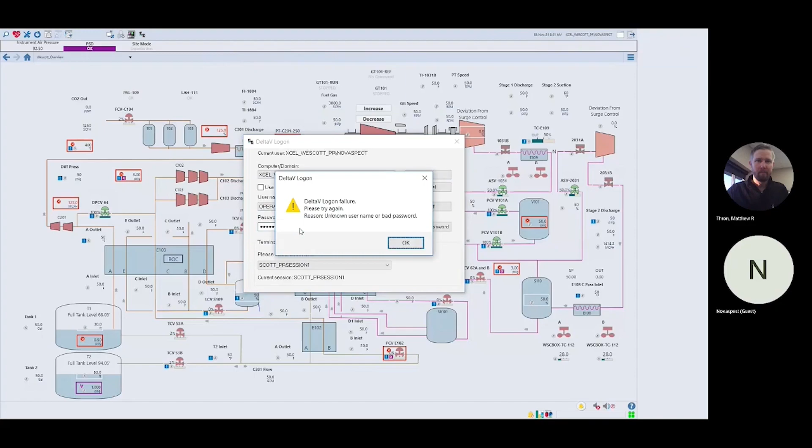So for now, at your site, it's going to be 'operator' as your username, and just 'operator' as your password. Like I said, I think that's probably going to change here in the next week. But for now, that's the password. I guess it's not on this system, but that is the plan.

So if you do that, you take your username, type in your password, just hit enter. You'll see the username change - that's to make sure you're logged in.

So then, say at the end of your shift, you want to hand it over. You can either decide to log off then, or have the next guy log off. But you probably don't want the next guy to log you off, because they might not log you off and just keep you in there. So if you click that name again, that same login shows up and there's a log off button, which will just give you no user in there. So that's kind of logging in and logging off.

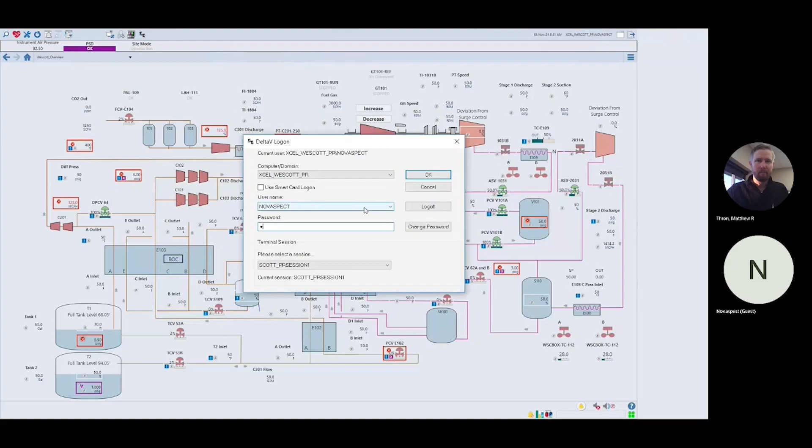Pretty easy, it's just that button up there in the top with the name in it. And like I said, the plan is hopefully within the next week, trying to do it before we start running everything, to get the usernames and passwords in there. And I know Xcel will be communicating passwords and stuff with everyone.

And with those usernames and everything, there are different privileges. So operators are going to have different privileges than, say, me as an engineer who's going out there - I can make changes, do things. Our operators are given the privileges to interact with the plant, alarms, different things like that - that's kind of the big thing.

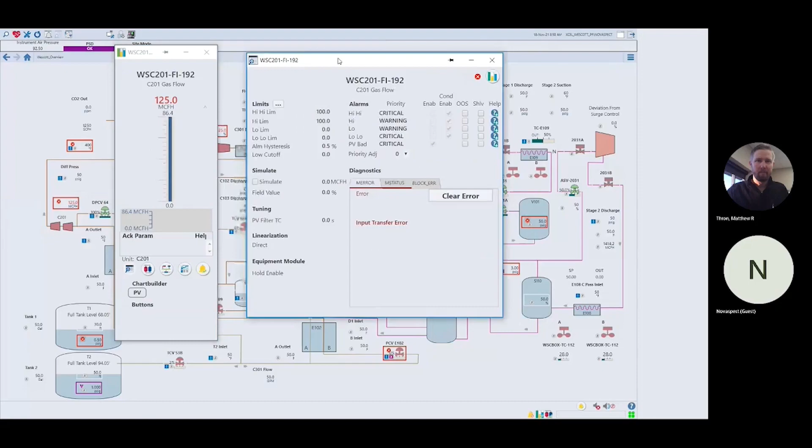Then the next one that I think is important is the tools - it's the wrench and screwdriver crossed over each other. This has a few different things.

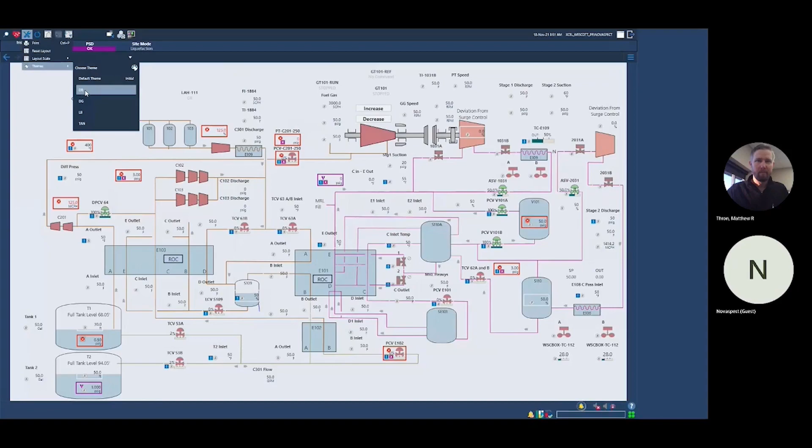The main one that you guys will probably want to change is the themes. I think there's 5 different themes you can do that change the whole theme - dark blue, dark gray, light blue, and tan are the big ones. So this is just the default, which is the light blue. If I switch it to dark blue, you get that dark blue shade. Then we've got dark gray. Light blue again is that default one, and then tan.

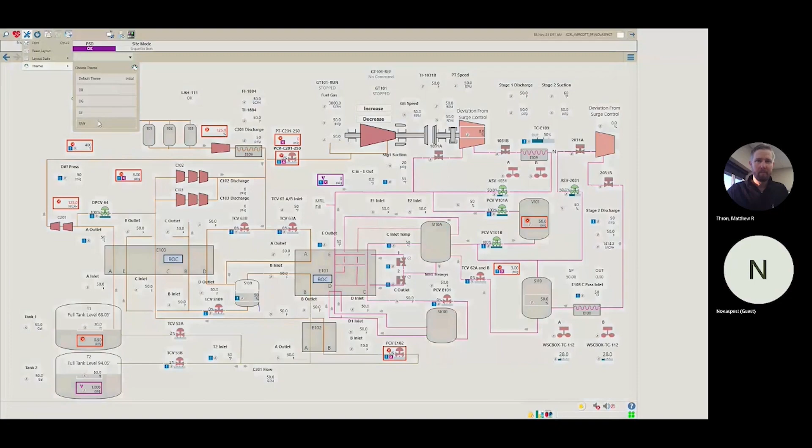It looked like an operator had put it to dark gray on site, and then yesterday or 2 days ago when I was there, someone was asking how to change it. They wanted to change it to light blue - a little bit easier, I think, to look at, but on night shift I probably wouldn't want to look at this either. I'd probably switch it to dark gray as well.

So moving on, this refresh button, that little circle button, looks pretty similar to, say, a web browser or something. This is going to be kind of important as we're still working with your site and doing things like that, because you can see on the sheet there's a little yellow star that shows up on it.

If you ever see that star, just hit that button. Nothing will change visually, but it'll go grab the newest version of the graphics. So if we made a change, that light will turn on. So if you want us to move a valve somewhere or make something easier to read, that's the only way you'll be able to see it. You'll see a little star up there, and you can hit that and it'll refresh what you've got.

So the star shows up. Yep, refresh button. Overlapping or something. Yeah, it's like on it. I think it's pretty clear to see once you see it.

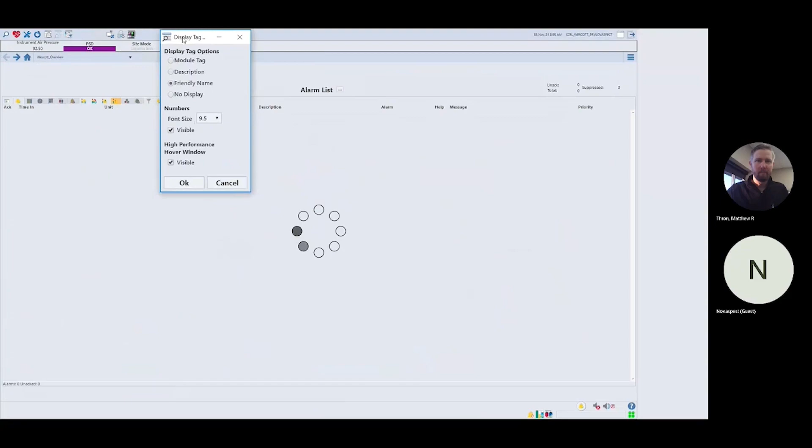The next one I think will be important for you guys, the one I've seen people use, is this display tag settings. It'll be either the last or second to last button, depending on what's open on your screen. What this does is change what the display tags say. Let me switch back here. It will change what the display tags say, like say of this valve here, we see it read as FCV C104. That's because it's set to a friendly name.

You have some options. You can do the tag, the module tag, and this is what DeltaV knows it as—that's also what you'd see on the faceplate. So the module tag is what you see up here on the faceplate. If you change it to friendly name, it'll show you what we have as our friendly name.

We've tried to match our friendly name to be exactly what you guys had on SciTech. So on SciTech you'd look at this and it'd say FCV C104, so that way you're familiar with it instead of trying to completely forget what you know. You can also do no display, but if you don't know what anything is, it's going to be impossible for you to really interact and operate well. But at least it unclutters the screen a lot.

Did you click on a description one? Yeah, so the description typically won't necessarily fit all the way, but it'll give you the first 16 or so characters of the full description. And if I open up this valve again, it's the same description you'll see down here underneath the module tag.

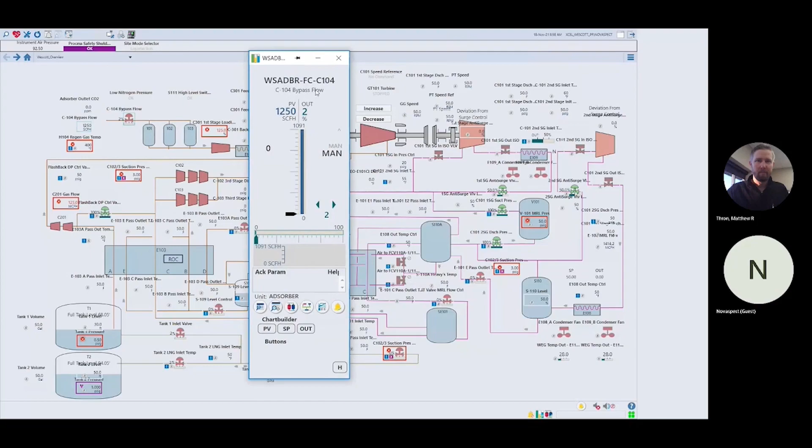So I think the site has kind of always left it as friendly name since we've gotten there. The other thing you can do in this display tag is change the font size of the numbers so you can read them a little bit easier.

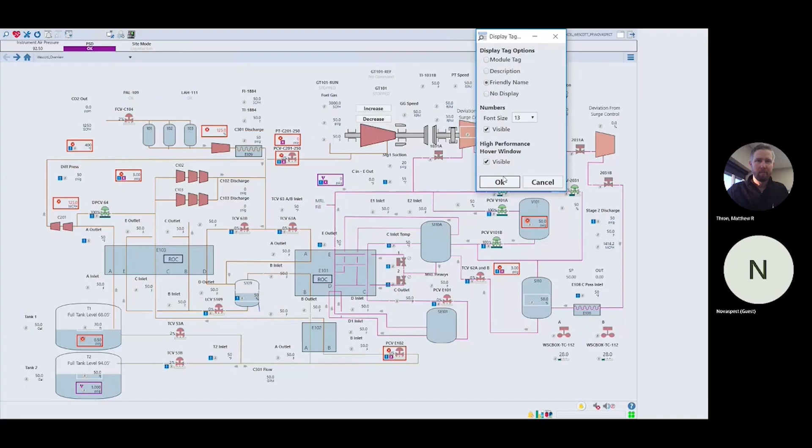When we first saw our first screenshots, it wasn't friendly - it was whatever the other one was, the module tag probably, and we had no idea what it meant. The screen was super busy. I don't know if friendly name came up after that or if it was always there. I think it was there, and when we saw that, it was like, you know.

So some of them we kind of don't have a friendly name on, like just down here, we have our tank level and tank pressure. We don't really have that yet - after we get more familiar with the module stuff, I guess we'll just maybe go back to that. But yeah, the friendly name is kind of what it is now, and like you said, it's because of what we're used to. It's not an easy change, so we try to simplify it when we can.

So like I said, the big thing also in this display tag settings is your size as well. You can change the font size so you can read it easier, so you see the numbers get a little bigger. This shouldn't normally cause any overlap, but it might in certain spots.

When you change a parameter on the display tag, does that stay with your profile? It does not - you have to change it every time you log in. I think it might be something we could look into, but I'm pretty sure it's not.

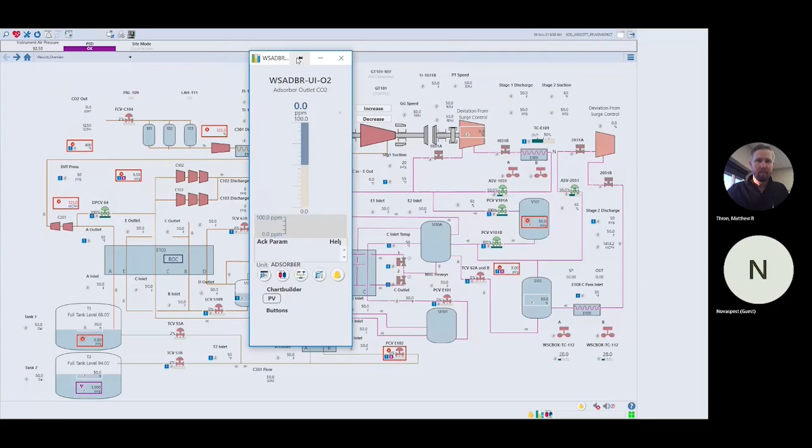So on the screen, if there's a value or a valve or something, we typically call that a gem - it's just kind of Emerson's word for it. That's something you can click on and it'll pull up a faceplate, which is where you can interact with or read more detail about what the value is or what's going on in the module.

So basically, you click on the valve or click on the value here - like you click on this, you get your C104 bypass flow. But I don't think you'll hear anyone but maybe an engineer call it a gem realistically. If you call it a valve or a reading or whatever, it'll work as well.

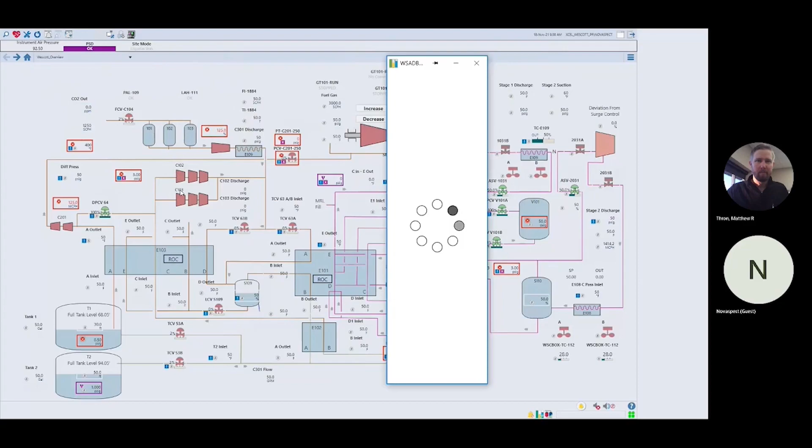So like I've brought up a few times here, this is a faceplate. A faceplate is where you can interact with modules - like a PID loop, a control valve, a discrete input-output valve, or like a pump or compressor, whatever. What this does is give you more information, more readings about what's actually happening there, as well as more buttons and things you can do from there.

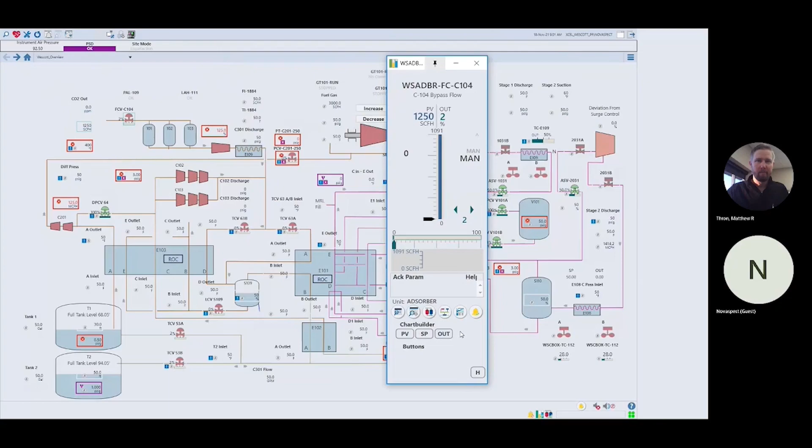So typically, if you want to make changes, you'll want to open up the faceplate to start or stop a pump, or open or close a valve - that's where you'll see that the most. Can you trend those parameters over time?

Yep, so right here is your chart builder. This is where you can read that, and it'll have however many buttons you need to trend basically what we're recording in our historian. So this is a control loop - we have our process variable recorded, our set point that we're trying to control it to, as well as our output, say on a valve. Those are all recorded, and you can make a chart with that.

And so a way you can do that is on this faceplate, like I said, this chart builder - if you just click one of these things, you'll see it add to the chart up here.

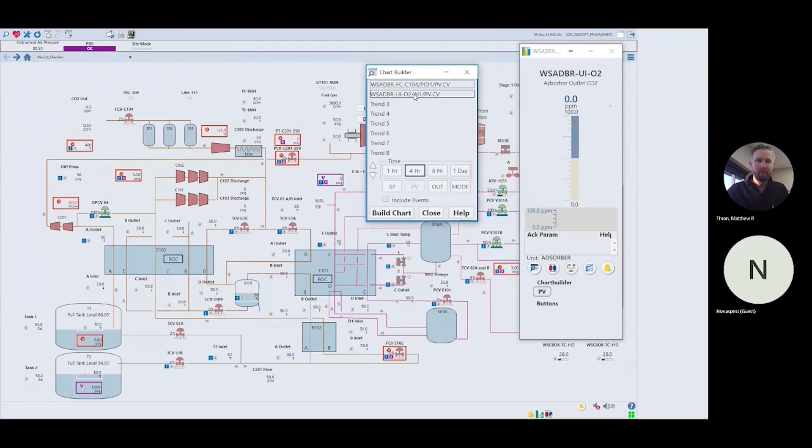And with that, you can also add more things to it. So say I want that value as well as, let's do this one, our CO2 out. We can add this to it and it'll just add straight to that chart builder. And you can add 8 things to it at one time.

And you can go back in time for 1 hour, 4 hours, 8 hours, and 1 day, just from here. You can go back as long as you've been running, but just to get the graph started, it'll show you the last hour, 4 hours, 8 hours, or a day, and you can move from there. So then you just choose that, and you hit build chart. This isn't probably going to work here because we're not recording anything.

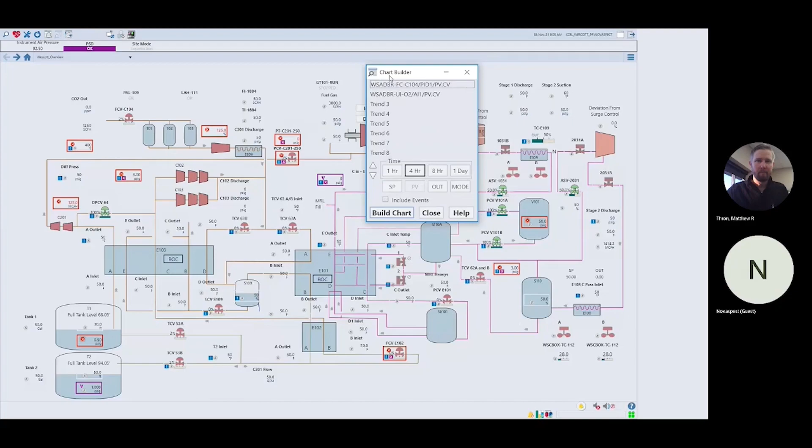But on your site, it'll pop up with a graph, and it'll have all your values there. I know we've had some operators throw up the tank 2 pressure to trend that, so they could turn on your boil-off compressors when they need to and things like that. Just some of the things I've seen.

Say you built this chart, and later on you're like, oh, I want to add another point to that chart. So this would start to build the chart on you, then go and add another point to that existing chart. Yep, so you do that through the graph that shows up. The process history view is what it will be called.

And there's a chart drop down. You can just say add point, and you can just type what you want to add. Unfortunately, it's a little cumbersome to do that. I think the easiest way to add points is just to make a new chart using this chart builder. I think it's faster, it's a little bit easier.

So then if you want to get rid of something. And here's something I talked to you about this last couple days. On the one computer in there, the operator computer, they have another icon on the top of their screen that they can click, and it'll bring up a stacked view of all the charts they have made.

The read side does not do that. Yeah, I think I figured out what that is. It's just a change I need to make on my end to make that work.

Can you pull up a chart now? I can't because we're not recording any values on here, unfortunately. Because I would like to know, like if you build a chart with T1 and T2's tank pressure, the y-axis is different on each one.

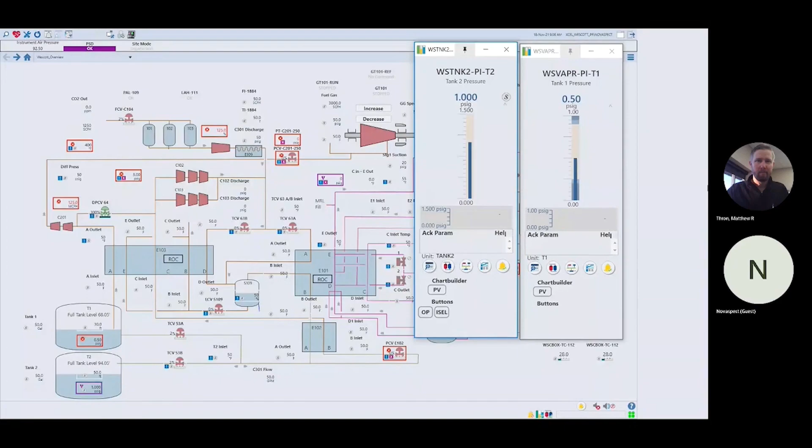Or what we can do is make a chart that we just save, that the operators can open and close. Yeah, that would be pretty nice. With the tank pressure, just one y-axis. View chart, so we can either leave it where it's just always behind your screens, or not, right? Just some of the ideas popping into my head.

But yeah, unfortunately, like I said, this system here isn't historizing any of our data, so we're unfortunately not really able to build any charts.

So from this faceplate, like we've been talking about, there's a couple things you can do with it. You don't need to pin it anymore, I turned that off for you guys. If you open up a faceplate, it'll stay open until you close it, which is something everyone just forgets about, and then it's annoying to have to reopen it. I get annoyed with it too.

So what you can do is, above the modes, there's a little caret, might be tough to see, but I'm hovering over it. If you click that, it'll bring up a little mini faceplate which shows you just the information you need: your value, your set point, your output, and what mode you're in. You can interact with it here as well, so if I want to change the output or the mode, I can do all that from here. And if I click that arrow again, it'll open up the full-size faceplate.

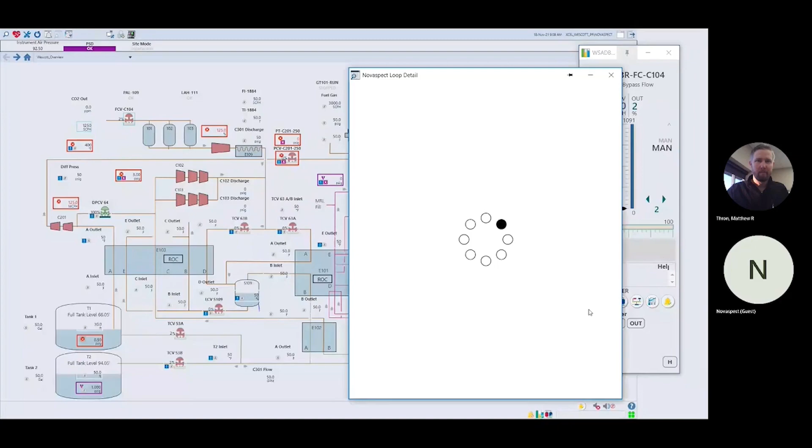From this faceplate, you can open up a detailed display, which is this button down here with a little magnifying glass on it. This is where you'd find your alarm limits, your high limit, high, low, deviation alarms, whatever other alarms are there. You can see your limits there if they're enabled.

Depending on the privileges - we're talking about changing some privileges here around alarms - you're able to shelve an alarm for a certain amount of time, like I've talked about. For example, if a transmitter is bad, you can shelve the alarm for a certain amount of time from here. Also, for a loop, this is a bit more on the engineering side, but there are tuning parameters and other things that'll show up here.

When you shelve an alarm, that basically puts it in bypass and turns it off. Is there a box to put in a reason why you're bypassing it? Yes, there will be. Does it automatically prompt you to put in a reason? This one's not showing it because I have different privileges logged in right now, but if you click it, it'll pull that up. Yes, it does require you to put in a reason for why you're bypassing it.

On site, we were testing it yesterday. It'll pull up a thing with a bunch of reasons, as well as a time limit for how long you want to shelve it for. So you can't just shelve it forever, it'll come back at some point automatically after the time. Does it put in the username also? Yes, it does. So based on your username, it'll have a reason for why you did it, as well as a timer for how long it's shelved.

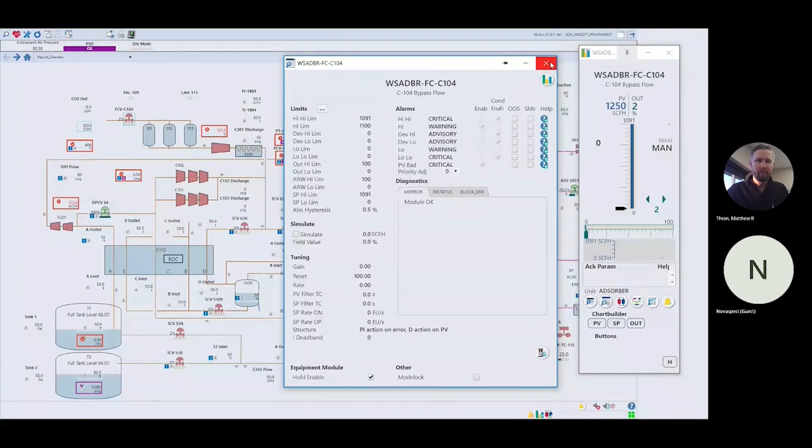So another thing you can do with these faceplates is minimize them, kind of like a window you have open on your computer. And if you notice on this menu bar, another button shows up. If I click it, the faceplate opens back up and that button goes away. So you'll see if you have more apps open in the background, like process history view or a faceplate, the buttons let you know something is behind your operator screen that you can click to get to.

If you minimize several of these faceplates and click it, it'll show you the list of all of them you have minimized. So if you just want to hide it until you get there as you're moving around the screen, it's a good option. And you can close them from there, or open them back up.

Those faceplates remain minimized even if you go to a vaporization screen. So if I minimize this, and let's just move to the vaporization screen, and if I open that back up, it'll stay there. As well, it'll stay open no matter where you go within your screen.

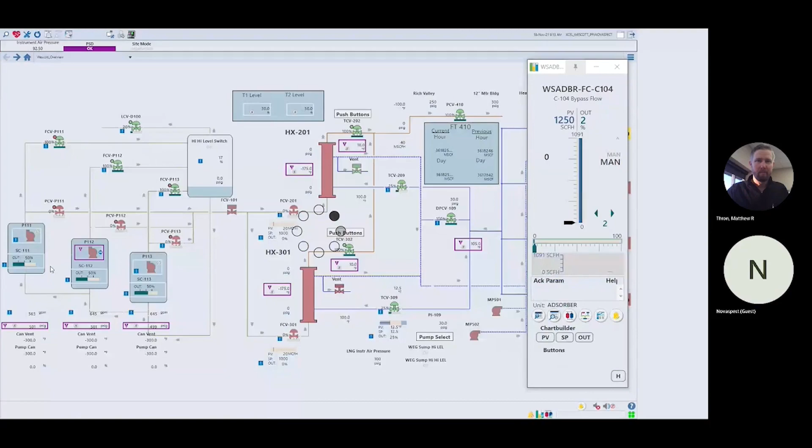So that would allow you to monitor, let's say, tank pressure and boil off while you're doing another evolution. That's another good option for making it a mini version as well, so you can put it off in the corner and keep an eye on it without it blocking everything.

Do you guys have a protocol yet on which 3 screens you normally have? No, but normally we all leave them the same, the lead operator. Normally either, so the heavy hitters are the same for everybody.

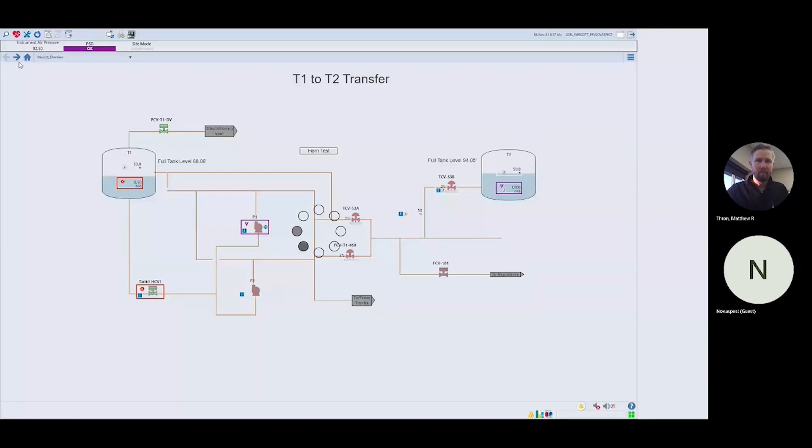You can also, if you long click, it'll show you all the ones you've opened, so you can just click if you want to skip a couple without having to click through.

And then that home button, if you click that, right now it's going to take you to this overview page, which sounds like a liquefaction page. So if you click that, it'll take you to that page.

This button over here on the side, with this, it's only one screen, so it's not going to be able to show it. But what you have is you can either swap or copy screens across. Say you have your C102, 103 screen and your liquefaction screen here, but you want them opposite. You can hit swap and choose which screen to swap it with, and it'll let you swap. The numbers will show up on what screens are what, and you can just choose to swap there. So in case you want to try swapping those buttons, it's there if you want it.

On that menu bar, is there a tools option? Yeah, if you go to tools, you can click print. How easily does that work? I'm not sure if you guys have a printer that's going to be connected up to this.

I think that's what I'd have to talk to Chuck about. With the old SCADA system, there would be times when you'd see something anomalous or weird, and we'd immediately print. It was print, and then I can't remember if there's one more print screen, but it immediately spit out, for troubleshooting stuff. No, I know exactly what you're talking about.

I want that to be really easy, because sometimes these anomalies might be really quick. So if you hit that print button, get a screenshot of that really fast. You hit that print button, it just pulls up a print menu page, and it'll have the printer set up that will be connected to it. But there needs to be one connected. I'll talk to Chuck maybe tomorrow, if he's there, and make sure we have a printer hooked up to them, so then we can just print directly to that when you do it.

I would hate for that to be like, oh, where do you want to put it, on your H drive first, blah blah. No, I just want it to spit out and hurry up, you know. Yeah, it'll just say print.

So Sam, in that regard, what Dave's asking, let's say I'm a little slow on the print, but can I go back 2 minutes in history for that screen and see the state of affairs? So the history won't work as, say, on the graphics. This is where your process history view and your chart builder would show up. So if you did see something weird on tank pressures or things like that, you could build a chart and see exactly what values were, what state things were in, and stuff like that.

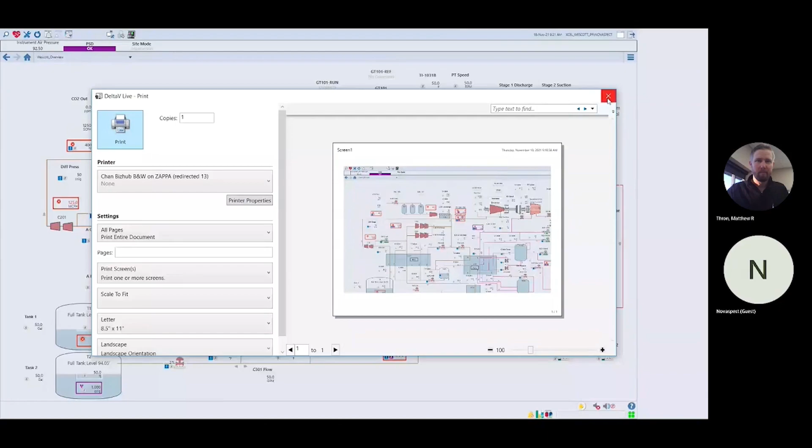So you can, on that chart builder, if you didn't have a certain value up in the chart, if you want to go back, like you were saying, print it out, can you go back in that chart builder and go back to the history of that point, whatever point you're trying to go back in history and find out what that value was, maybe a half hour ago, if something happened? Yeah, like I said, we're recording data pretty much from when we put this thing on your site, even though you didn't have a current chart set up for that.

So the other thing these faceplates will also do, down here I think it's like a 4-hour chart of your history of the data. So if you open up a faceplate, it might be tough to read, but you can at least see a quick overall trend of where the point has been, if you want to follow along with that trend. But if you do the chart builder, it'll open up and you can choose the time frame of how far back you want to go, and then there's a scroll button to just move back in time.

And so when I was on nights, I was messing around with that chart builder, track with real time. I eventually did it and I couldn't repeat it.

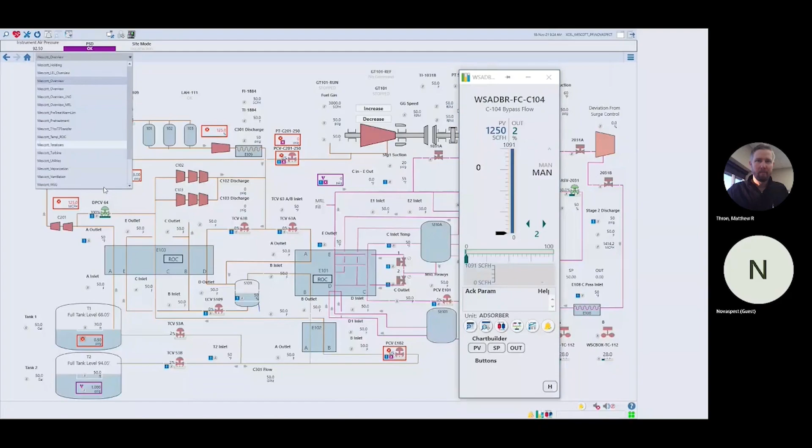So, on these faceplates, let me switch to a different display here. So there's little options with them. These faceplates are going to have a handful of buttons on the bottom. And what these will do, let me try to think of one here. Let's do this one, we'll do our temperature control valve 302.

This right now is just a manual loader. On site, we do actually have the feedback position on the valve, so it'll look slightly different than what you guys actually have there on site, as well as we'll open up a heater just to kind of see. So down here, on the bottom of the faceplate, you have buttons, and these buttons are going to give you either data or ways to interact with the controls, or whatever else you might have, and they'll only show up there if there's actually data in them.

So there's kind of a few different options here. You've got your module variables, so these are going to be values that... that's motor valve, sorry. You're good.

Just want to make sure we're not going over this later. But it doesn't tell you what it is, right? Is that it? If you hover over OP, is that module variables?

Yep, it'll tell you operator variables. So module variables are going to be variables that operators can't change, say alarm limits or what output percent to do. Supervisor privileged accounts can change it, like instrumentation guys. If you just talk to them, they can probably change it pretty easily as well. But these module variables are there more for you to see what's going on, like at what temperature a valve is going to open up. It'll show up there with the description as well as the value.

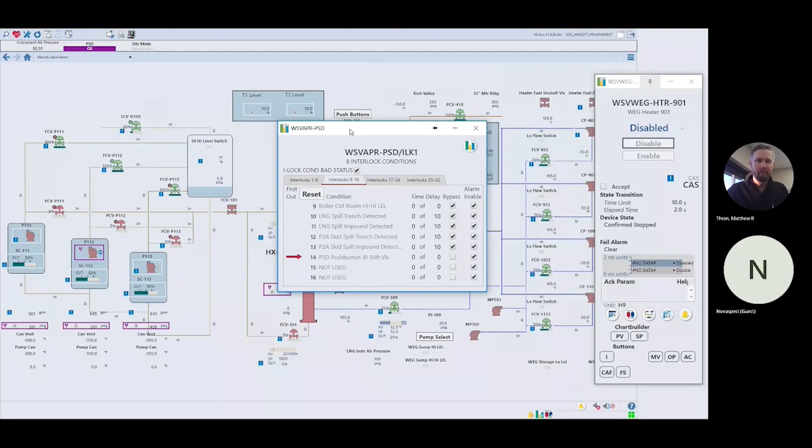So there's also going to be - I wonder if it's on here - okay, so what it'll also tell you, there's going to be a first out area on it. What this one will do - say a plant shutdown occurs, right, you lose power to a bunch of stuff from doing that. So then not just the plant shutdown will trip, but kind of everything else. Say pressure goes down or whatever else happens that might cause a trip, all those start coming in and you'll see them on the interlock page. The text will highlight, but there'll be a red arrow like you see here next to this PSD push button at the 50-foot valve. That red arrow will tell you this is the first thing that came in, this is what actually tripped it.

So yeah, that first out button is pretty important. And then if you reset it, that arrow will go away. But if you don't reset it, if you start running again and then it trips again, that arrow will move to the most recent thing that caused it to trip.

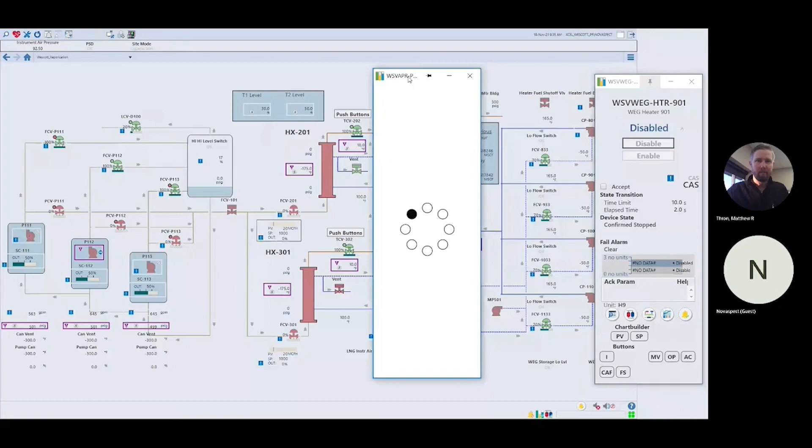Can you pull up that screen for the key? Yep, P111. This is where we should see the can temperatures and stuff like that. So yeah, you'll see also there's more tabs if there are more interlocks than that. So we've got the discharge pressure is high, the flow is low. I guess I'm looking for a start interlock screen, is that a thing?

Oh yep, a permissive. Oh, permissive. So yeah, the next thing is our permissive screen. So these basically need to be met - these conditions basically need to be met to allow you to run. Once you click on the P button, yep, it'll get to that.

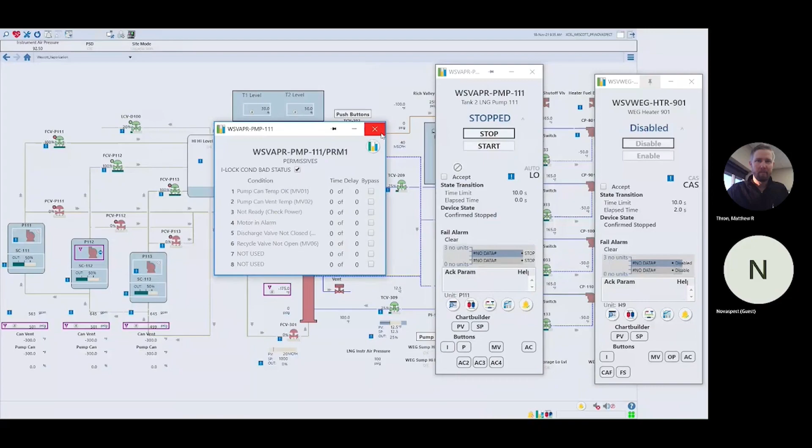Weren't you over like P111? You were over at eight, right? Yeah, so I just moved this faceplate over. So this is the P111 faceplate. Okay, and if you open up this button that says P, Permissive, it'll say - if you hover over it, it'll tell you permissives.

Okay, and that'll tell you what there are. Right now, like I said, we don't have any active, but it'll show up here, right? The can temp is okay, the vent temp - it's not ready - all these things will show up there. And so then you have to clear those or get those resolved before you can actually start that.

So that's something that we, even when we're not in vaporization season, we keep those permissives met all the time, even if we don't have an impending vaporization. So it'll be there. Everyone thinks we're not doing anything on nights, but we're actually maintaining these permissive values by cycling level and P100 and whatnot.

So you'll see these buttons, like an interlock or a permissive. You can kind of see it under the I button up here, it's flashing red underneath it. That'll tell you that there's an interlock active or anything like that.

You'll also be able to tell if this mode says LO. It's called local override, but I always think of it as saying locked out, meaning you can't do anything with it. If you try to start it, it won't start. If you try to do anything, it won't. So it's locked out in my brain - I know what it is, but I still say locked out when I see it.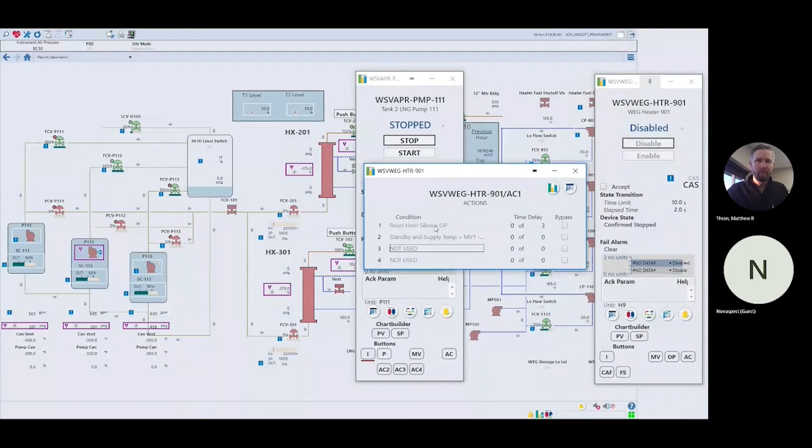So the other buttons that I think would be kind of important would say either AC on them - I'm looking at the heater over here on the right side. This is your actions. This will basically tell you an action that would occur, and it'll tell you what the action does. So if that button's lit up, kind of like that interlock is, that tells you an action is active right now.

So this one is basically like a reset horn. If the horn comes on, there's an option to reset it, and if you do that, that action will light up telling you it's resetting it. That's pretty much it, so you'll see some of those buttons as well. You don't necessarily need to see them unless you're curious about why something might start and stop at certain times. Those actions will kind of show you what they do.

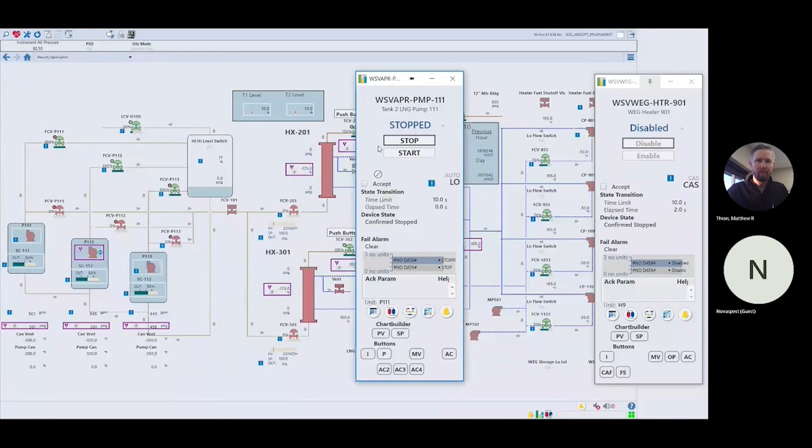Let me see if it... so like on this P111, I just clicked the AC, not the numbered one, just the first one. This is where it'll tell you - there's an active action right now where the pump is stopped, so there's no longer the pressure interlock. It's disabling it, and that's what it'll do. It'll tell you what's happening there if you want to see it. A lot of that stuff's kind of background, but you're able to at least see what's going on.

You might also see buttons - the heater, we've been looking at it this week so it's fresh in my mind - that you're kind of like, this isn't any of the other ones, what does this mean? Like this heater has a CAF button and an FS button. That's your combustion air fan and your flame scanner, which is kind of what we're going over.

If I hit that combustion air fan button, it'll open up the faceplate for the combustion air fan, or the FD fan, for that heater. But if I hit the flame scanner button, it'll open up the display of the fire eye, telling you where it is in the sequence during the light off of the boiler. It'll show this message, logic status, and status there.

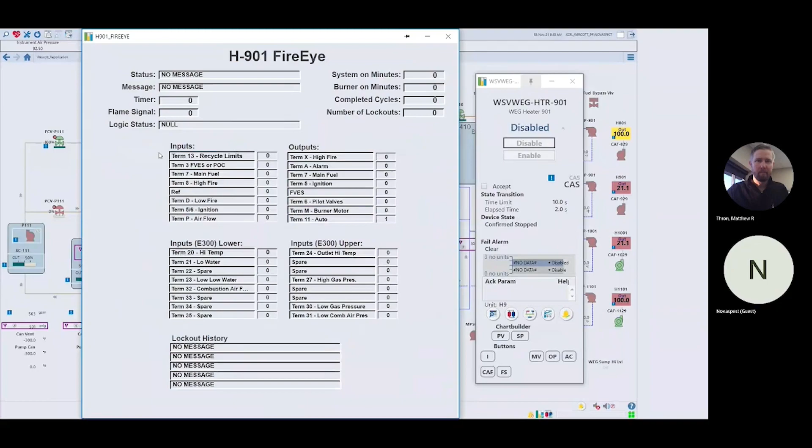Flame scanner - yep, we can change that too if we want to, if we want to call it FE for fire eye or whatever else. Just let us know if you guys don't remember or want us to make it easier. Some of those changes are pretty easy to make.

So the next faceplate you'll see is specifically related to C102 and C103. We call them equipment module faceplates, but they're basically your sequence faceplates. I clicked right here under where it says C102 sequence, and it opens this up, telling me what state my sequence is in. So I'm in idle right now. It'll say what the sequence is and who owns it.

In case it gets owned by a different sequence - but you guys aren't going to run into that, it'll always say operator for you. And then under here you can select your run command. So if it's idle, you have start and stop. If you're in the process of the sequence of starting up the compressor, there's a stop and a pause. The pause will just kind of hold you, shut everything off, but then go back basically into the sequence quickly to where it was last.

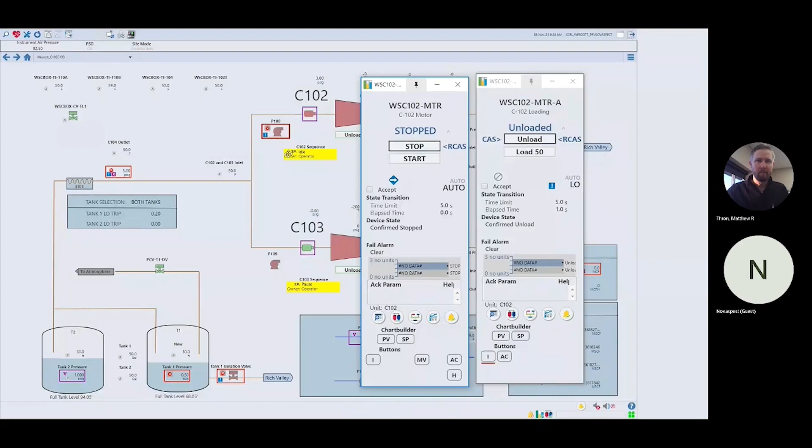But it's loading. I'm just going to force a couple things to show you guys. You can hit this load 50% and it'll go to 50%, and then you can choose to go to 100%. Then you can go back to 50 and back to 0. Back to unloaded.

So those are kind of the faceplates you might see. We'll go over a little more detail here, but let's take a quick break so I can stop talking.

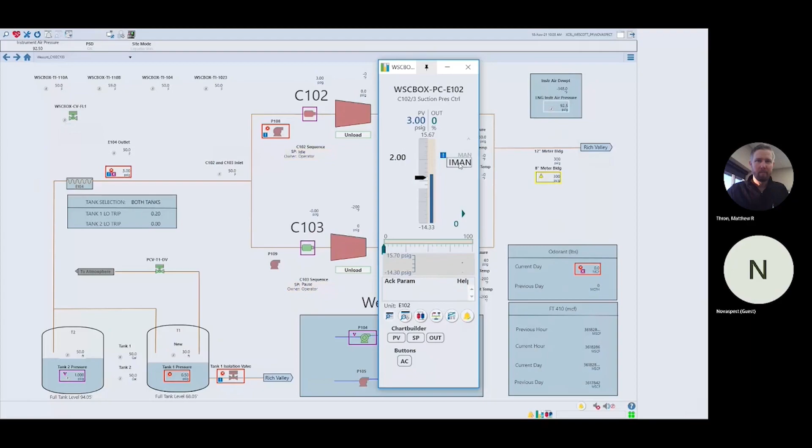And then that purple box will mean that you have some kind of error in the controls itself. Say like an IO point's bad, or there's some kind of issue. Like this one is because it's in IMAN, which of course we'll talk about in a little bit, but it's just some abnormal condition in there.

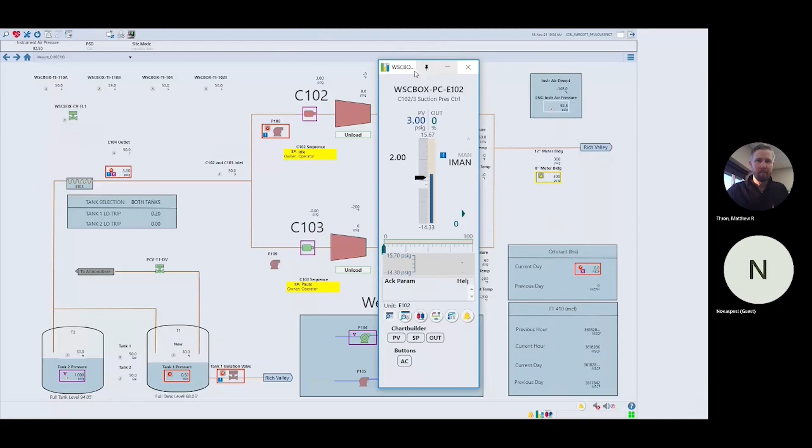That's when that purple box shows up. So that's not an alarm condition, Sam, just that something is abnormal. Yeah, it's just abnormal, right? That's beyond the operator's capability at that point, correct? Yes, yep. So that one's more like, hey, this is abnormal. I&C, what's wrong with it? Excel engineering, what's wrong with it? Or whatever else, something like that.

So let me go to a different valve here, just to take a look. You'll also see on these control valves, so like an analog valve, 0 to 100%, it'll tell you what percentage you're commanding it open to a couple ways. It reads out the percent. It's a little small to read right now, but it reads out 2% down here.

This one might be easier. It says 100%, and then they also have a little box that kind of fills up based on what percentage you're open. If you want to see it quickly, there's just a couple ways to do it there.

And then kind of like we talked about, up top is either your module name or your friendly name, kind of whatever you have it set to. And so on that, red is either off or closed, and then green is open. This is kind of the process we're using. I think one of the operators, Eric, was saying that where he used to work, it was the opposite. Kind of depends on the industry you're in. But so we're doing green open, red closed, or green on, red off, is the kind of way to say it.

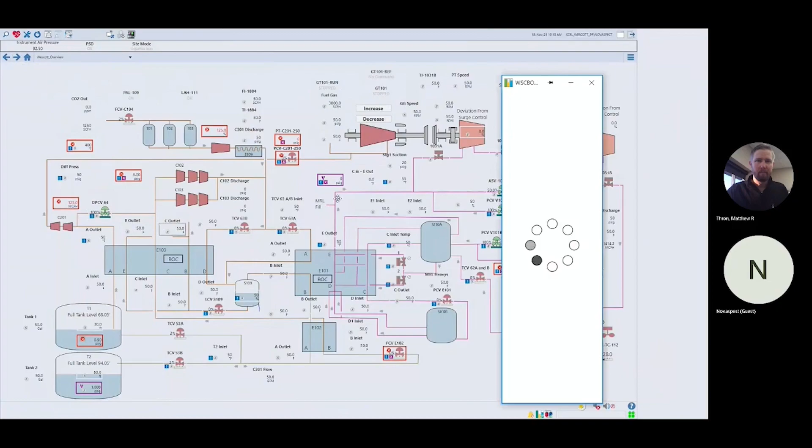All right, so moving on here — we kind of touched on a couple of things specifically with faceplates. We're going to go over a loop faceplate, like a control valve that's controlling on something, as well as a pump faceplate and a valve faceplate.

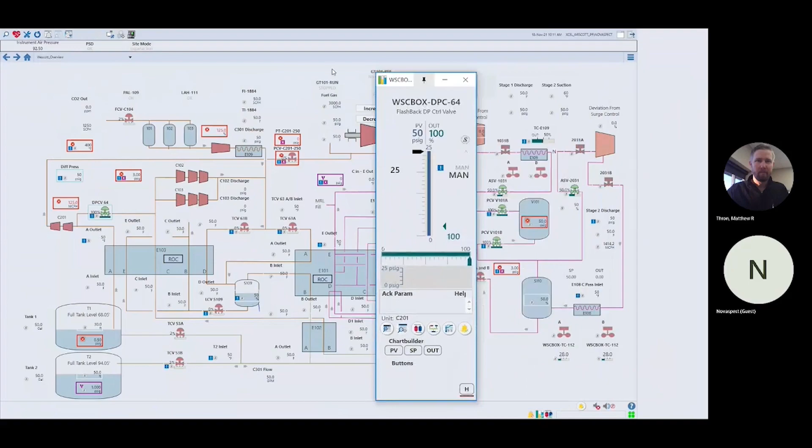So a loop faceplate, like I said, has a couple different things here. It has a vertical bar telling you what the value of your variable is, and you'll see that under PV, which we refer to as process variable. In this case, we're looking at the flashback differential pressure control valve — it's in PSI, and it ranges from 0 to 25 PSI.

You'll typically see this black arrow pointing in, and that's your set point. You can drag this to change your set point. Right now our set point's at 25. You can drag it to move it this way. Let me switch it to the correct mode here.

So why is it called a loop? What is the loop - is it the loop DeltaV component back to DeltaV? Yes. The loop is basically your reading, like in this case your differential pressure, and it loops to the control valve. The loop process is the control function telling how much the valve should open to change the temperature. It continually changes based on what the temperature changes to, which is why we call it a loop.

So in order to have a loop, you need some sort of feedback, right? Yes, correct, that's what I was trying to make sense. Some of the stuff is just like you said, good question - I just know it because it's what I work with, but it might not make sense to everyone. And some things I don't need to know specifically. No, you don't.

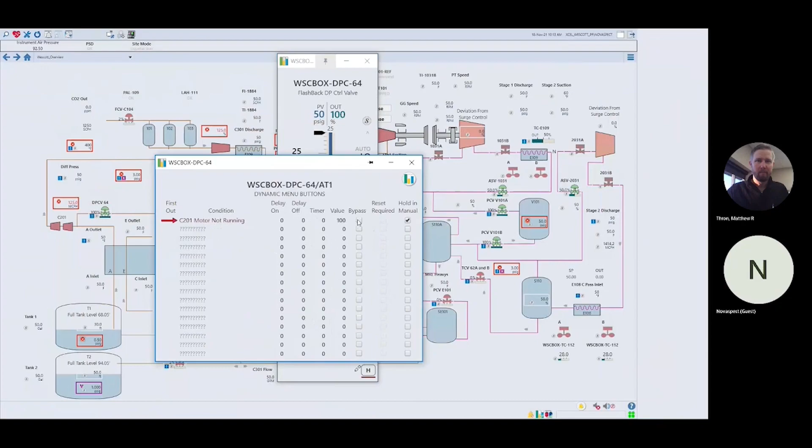So this PV is your process variable, like I said, that's the value you're typically controlling off of. So when I switch my set point to, say, I don't know, 12.5 or so...

When you change your set point, your output changes to try to control the value to that set point.

So say you have a level, and you want the level to be 50%. As your level increases, say you have a dump-off valve, so your valve opens to let some flow off, and you close it when it gets there - it kind of keeps doing that to keep it about that 50%.

Or the other way around, if it's a fill valve and it's continually flowing out, you just need to open it to keep the level where you want it - that's what that set point does.

So there's three ways - this fancy Foxboro controller - to change your set point. There's this drag function where you can just drag it. It's not as exact, but it'll do it.

And then there's these arrows, like our increment arrows, which will typically move it by one value up or down. So I hit it, it moves from 12 to 13.

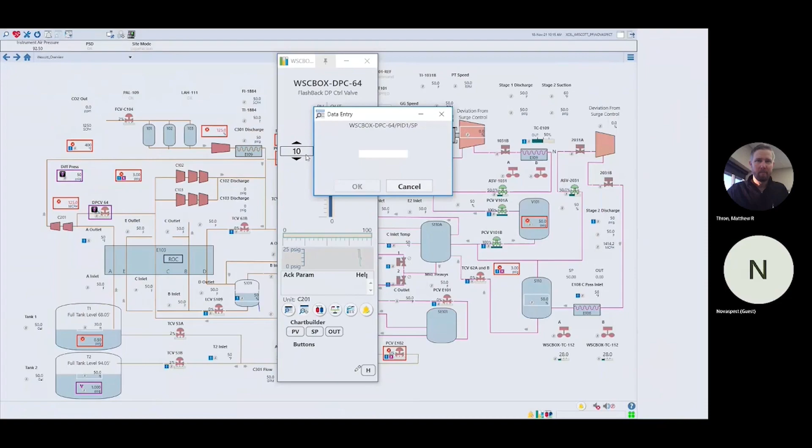So say I want to change what this is actually saying - if I want to change it to 20, I click on the 10. If I click that, it'll open up a data entry box so I can type what value I want. I hit enter, and it switches it to there.

Can you type decimals in there? You can. And if so, will the box change the increment to going up 1 or lowering 1 in that decimal? No, it won't - not originally.

So some valves, I don't know - it's something we can talk about if we want to make smaller adjustments with those buttons. But typically it's based on how big the scale is. I don't remember everything about it, but if the scale's like 0 to 10 or something, it'll change it by 0.1 or something.

Like I said, I don't know off the top of my head how much it increments by based on how big your scale is, because if your scale's 0 to 500, moving it one point at a time isn't going to do anything.

You could do like tenths or half - sit in either 0.1 increments or 0.5, and we do use that.

Maybe we'll have to see what we can do with that, because realistically, a graphical change is a lot easier to make than a control change. It's something we can definitely look at, but I'll make a note of it and take a look to see what we can do about that.

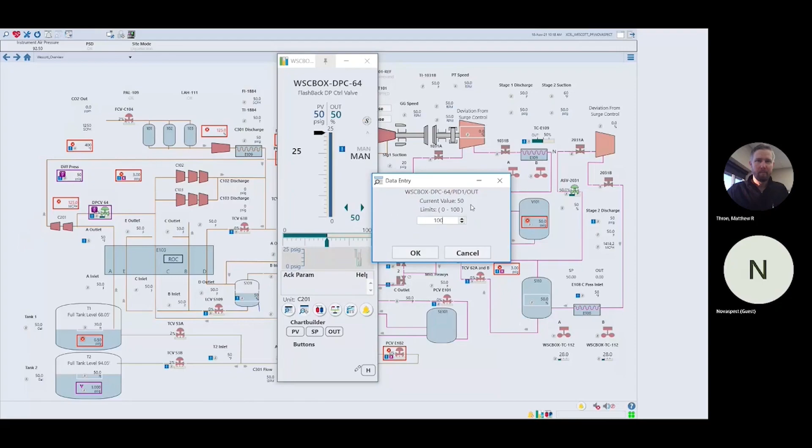Like I said, it's not an exact science dragging it like that. You can use these buttons to move it up and down 1%, or you can type it in, and it'll tell you the current value, as well as the smallest and largest value you can enter. If you go above it, it'll tell you the entry is too high, or if you go too low, it'll tell you it's too low.

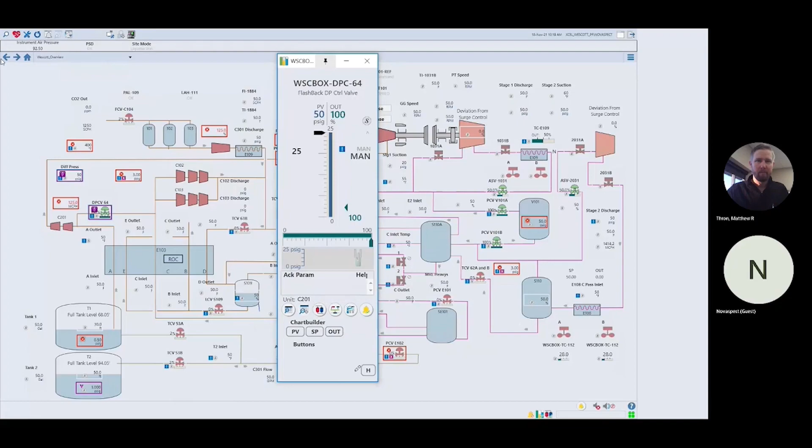We kind of talked about the chart builder a little bit more and some of these buttons down here. But these buttons you'll see are the same ones we saw in the search function, where you can open up your detailed display, your primary control.

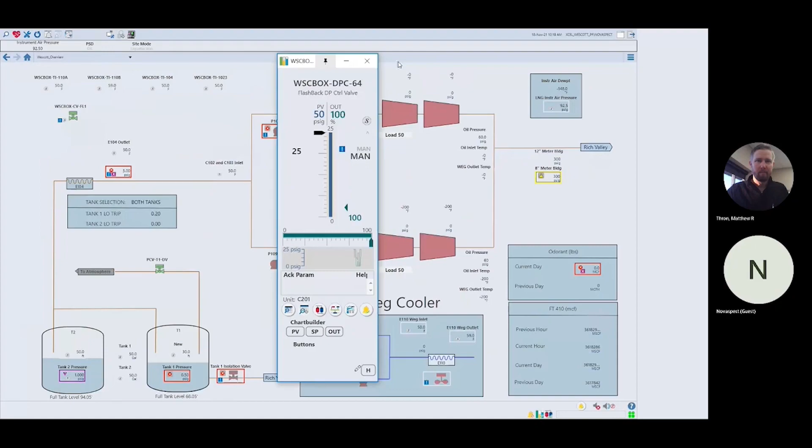So if I was on a different screen, and I had this faceplate open and say something's happening with this valve and I want to go check what's happening on that screen, I hit this red and blue button and it'll take me to that screen, back to the page it was on. And then the other main button is this acknowledge alarms.

So if you have a faceplate open and an alarm shows up, that acknowledge button will acknowledge the alarms that are active on that module, or on that equipment, I should say.

And this S here that you see, you don't want to see on your system - that's a simulate, letting you know that the values are simulated, which is kind of what they are here.

Moving on. So we've kind of shown you these valve faceplates, once again, what you could do with them, open and close them. A lot of the buttons and everything are very similar.

Something I should have shown you last time, but I'll show you now - these modes. You click the mode, it says it's in manual right now. If you click it, it'll give you an option to change the mode to whatever options you have. The main ones you'll see are cascade, manual, and auto. After we go over here in a little bit, we'll talk more about what those modes are, because getting your head around what those modes mean was confusing for me too when I was first dealing with them.

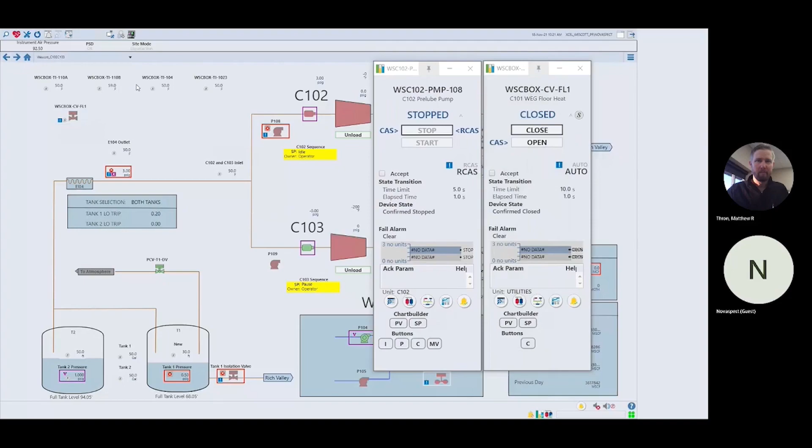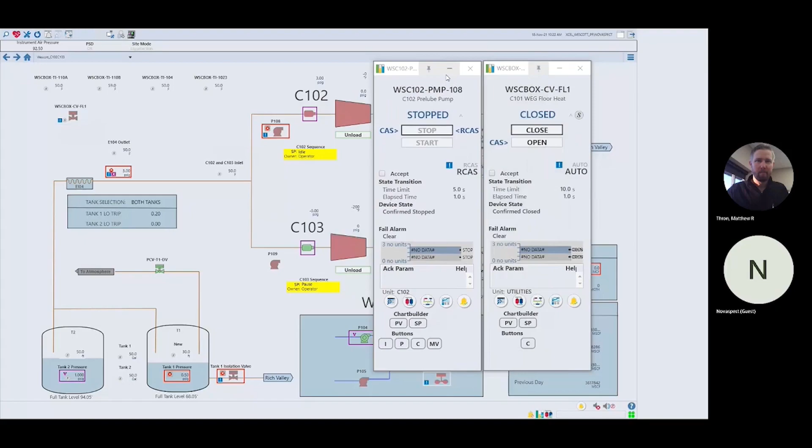So the motor faceplate is pretty much exactly the same as a valve faceplate, except instead of open/close, you have start and stop. I think for the heaters we're saying enable/disable. So they all work the same way - start, stop, open, close - it's just the wording that's different. That's pretty much the only main difference between a valve and, say, a pump faceplate.

Okay, so we'll skip ahead here to page 16, since we've kind of touched on some of these things already. This is where we'll talk about our modes and what they mean. The most common modes you guys are going to interact with are manual, auto, and cascade.

Manual means the output of your equipment is set by the operator. You won't see manual on a valve or a pump, because you're just telling those things to start or stop, and either the pneumatic pressure is opening the valve, or electronically you're starting the pump.

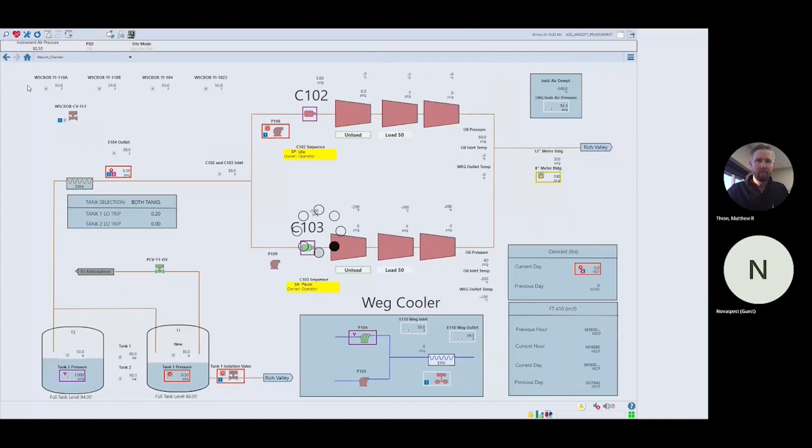That's why you won't see manual on that, but you'll see manual on a control loop, where you can see the output. You're actually changing the percentage output of the valve, which is why that's manual.

Automatic, or auto as you'll see it abbreviated, is the mode where the control system actually sets the output. This is where you set a set point. So say on a loop you're changing your set point to a certain value, and then the control system is telling the valve what to do. That's similar to a discrete valve we were just talking about.

I'm telling the valve to open, and then my control system is actually making the valve open. Does that make sense? Those ones are kind of backwards from what you guys are used to, right?

Well, I guess I'm still trying to wrap my head around that. So manual is where I feel like I should be putting in my number. But I can understand now why I'm putting in that number, but then it's automatically maintaining that. So while I'm sitting in front of it doing it, I'm manually putting in the number for it to automatically control, right?

So like I said, auto is basically what you'll see on pumps and valves, because you're changing the set point. You are saying open or close, and then the control system is saying, okay, you want to open, so I'm going to send this signal to open or close it.

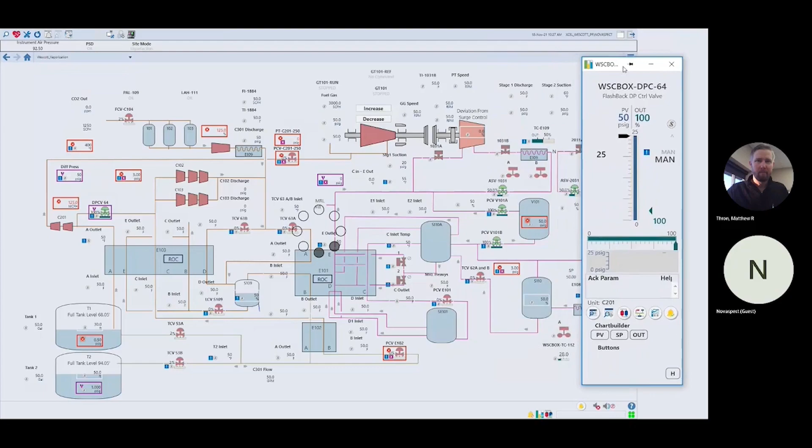So let me go to a page where I don't think it's going to show up on this one, but just to talk about something a little more familiar to your process. The firing rate of your boiler is basically set by this - sorry, that's the wrong one - it's set by this discharge temperature control loop.

The output is your firing rate on your boiler, and this is kind of how you set it. But what you'll see is this will be an IMAN until the boiler hits like 120 degrees, and then you can change your firing rate. That's because the wiring isn't connected until it gets to that temperature. So typically if you see IMAN, it's some kind of wiring issue.

With a control loop. And then local override, like I say, locked out means that you have an interlock active telling you, hey, something tripped this. You have to clear that trip before I will let you unlock this. And what you'll see as well, I don't think it's all of them, but some of your equipment needs a reset button on the faceplate. So if you're in local override or locked out from a trip, you might need to hit a reset before you can actually start controlling it again.

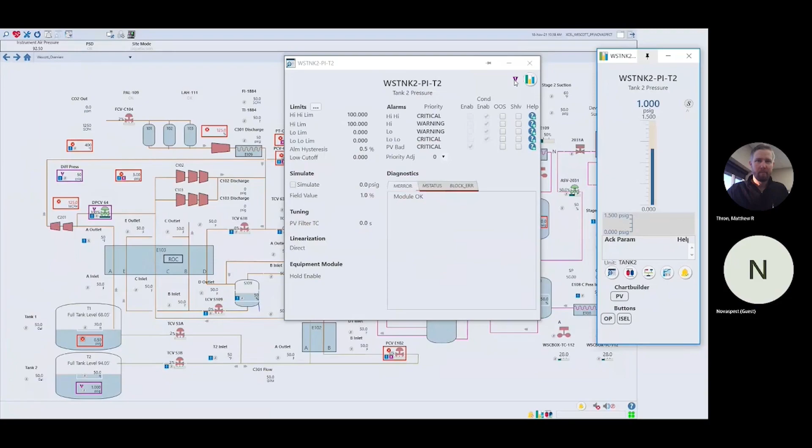Yep, it'll show up in the alarm list and it'll flash, but it will not give you the horn. I did not see the deviation alarms listed in the alarm matrix. Okay, I may have missed it. There would be a list of, I guess, the process variables or instruments that are affected. Maybe I'm misremembering - it may have been there and I just didn't see it. That would be a good list to have, I think. Yeah, I'll look and talk to some people and see what we've sent off versus what you guys have. I'll take a look over lunch.

Okay, does anyone have questions about the alarm severity and descriptions of them? If not, we'll move on.

So the next page talks about the alarm banner specifically. As I've brought up earlier, it shows your unacknowledged alarms first, then ranked by severity after that. So if you have 10 alarms unacknowledged, and 5 of them are critical and 5 are warning, it'll show all the critical alarms and then all the warning alarms after that.

And what you can do there, if you click it, it'll pull up the faceplate as well as the display that that alarm is on. So then you can actually interact with your alarm.

On the alarm banner, in the bottom right corner, there are a few buttons you can use - the important ones will be interactable. There's this yellow bell, and that's how you acknowledge all active alarms on the current screen you're on. So say I have a bunch of new unacknowledged alarms on this screen, and I hit this button - it'll acknowledge the alarms just on that screen.

The next one will silence - either turn on or off - the sound for the horns for a certain amount of time, and that changes based on your username. So if you log off, it'll get reset to turn on. The next one is the silence horn - so if the horn's going off and you don't want to acknowledge the alarm right away, you hit that, and it'll turn the horn off, but your alarm will still stay unacknowledged.

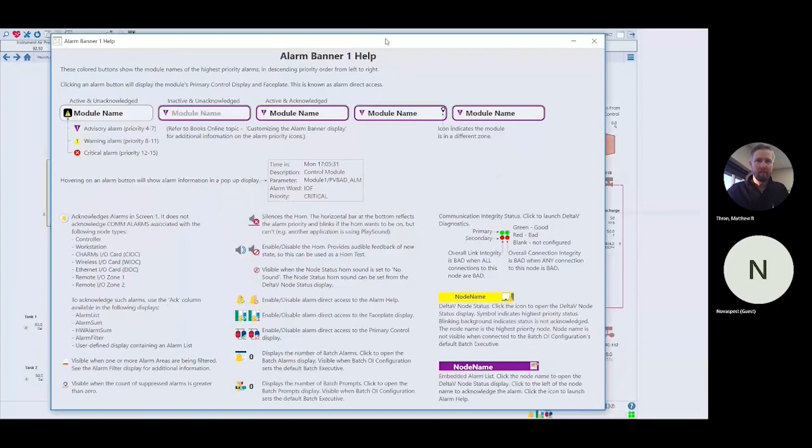And over here on the right, this little blue circle with a question mark is your alarm banner help. If you're ever unsure of what the buttons do or what any of the alarms mean, hit that and it'll give you all of this information telling you what to do.

And then finally, this icon with 4 circles in a box will show you hardware alarms. So if a computer is turned off, or any of our controllers or I/O cards or anything like that are having issues, you'll see the alarms there.

And then finally, these 3 buttons here on the bottom - by default these 2 are kind of hard to see on this screen, but on the page they point out 'faceplate' and 'primary display'. Those buttons have a little green check mark next to which ones are active. So right now, since faceplate and primary display are both active, if I clicked an alarm in the alarm banner, the faceplate and the display will open. If I just have the faceplate button selected, then just the faceplate would open, and vice versa with just the display.

By default, and I imagine it will be kept this way, both of those will be turned on, so when you click an alarm in the alarm banner, it'll open both the faceplate and the primary display.

If you're working and don't really remember all my talking, click that alarm banner help, it'll tell you a lot of information. One other thing I forgot to mention about the alarm banner is in the alarm banner help: if you hover over an alarm, it'll tell you what time the alarm came in, the description of the module, what the alarm is, and the severity of it. You can see that right here, maybe a little better here. It tells you your time in, description, parameter, and the alarm word—like if you have a low alarm, it'll say low alarm—and then your priority.

Any questions about that alarm banner? How did you get to that alarm? That alarm help comes in the bottom right corner—there's a blue circle. If you click that, it'll just pull it out.

When you said priority shows critical, which one is that showing? So right here—this one right now is showing a critical alarm, but these are just the options for it. You have your advisory, your warning, and your critical.

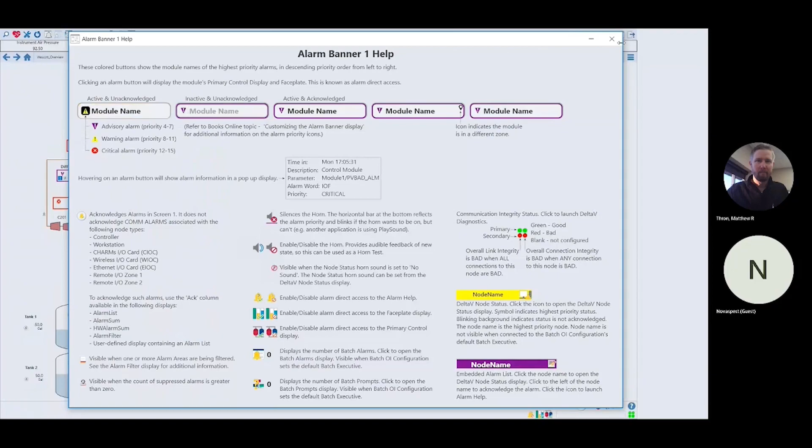Can you show an alarm banner for a certain point? If I clicked on a certain point, will it show if that's a critical or a warning alarm? Yep, that will. Let me see if I can find one here.

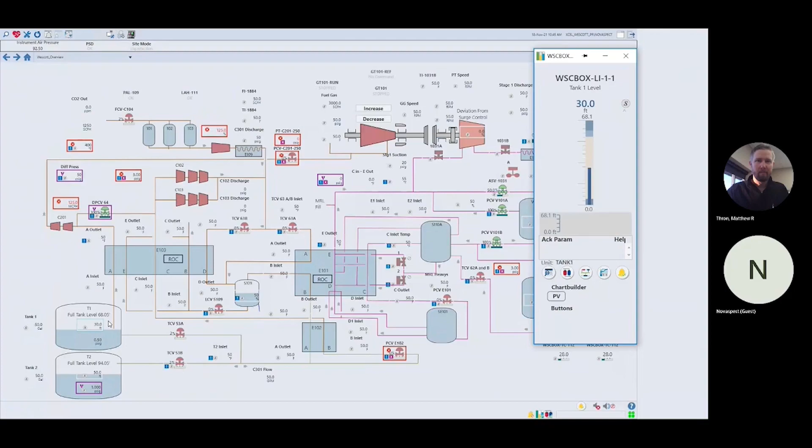Okay, here's a good one—the tank 1 level. This is a little hard to see on this screen, maybe you'll get used to it. On this faceplate, the internal area that's white is the good range for your value, and the blue bar in the middle is your actual value. Up top, there's a light blue, which is a warning alarm, and a darker blue, which is your critical alarm. So that's where it would show you.

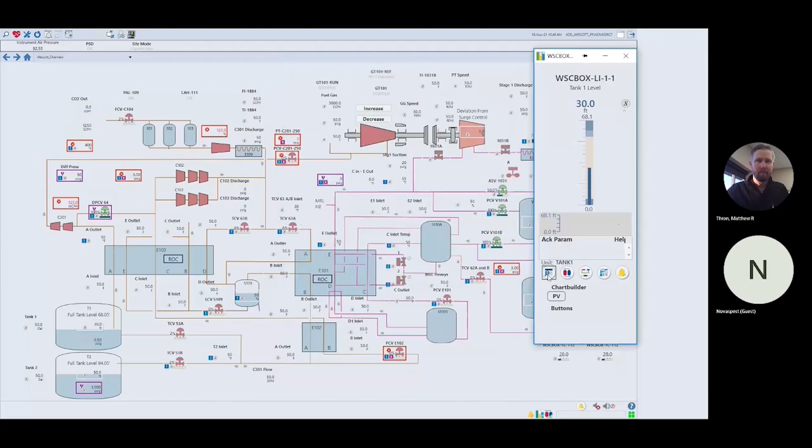If you click this detailed display, it'll tell you as well—what's enabled. That's this magnifying glass button down here. In there it tells you your limits, but over here is the important part: it'll tell you if they're enabled and what their priority is. So we have a high high limit at 60, and it's a critical alarm, and it's enabled. That's a way you can see that.

The alarm priorities—I'm assuming those would be user adjustable if the plant decides, hey, that's not really a critical alarm, or vice versa? Yeah, it's adjustable, but not typically by an operator. It will be adjustable by a different privileged user.

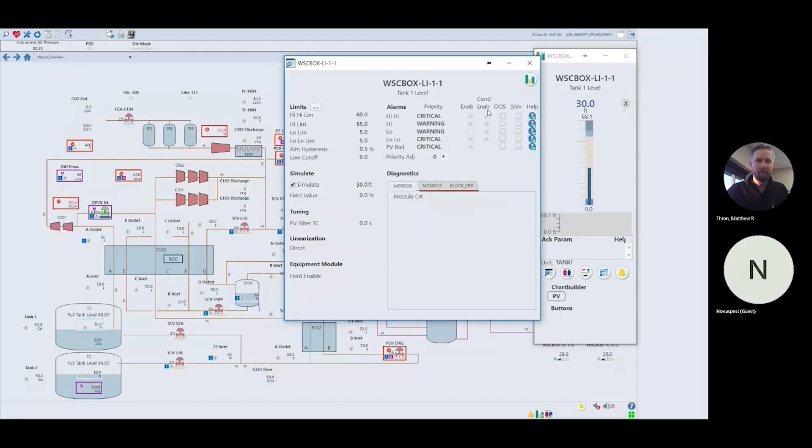When you pulled that up, was that a pressure you just had on? That was the level. Oh, I'm thinking—'cause I saw 0.5 and I thought okay, half a foot. I was thinking half a pound, that doesn't jive, but okay, yep.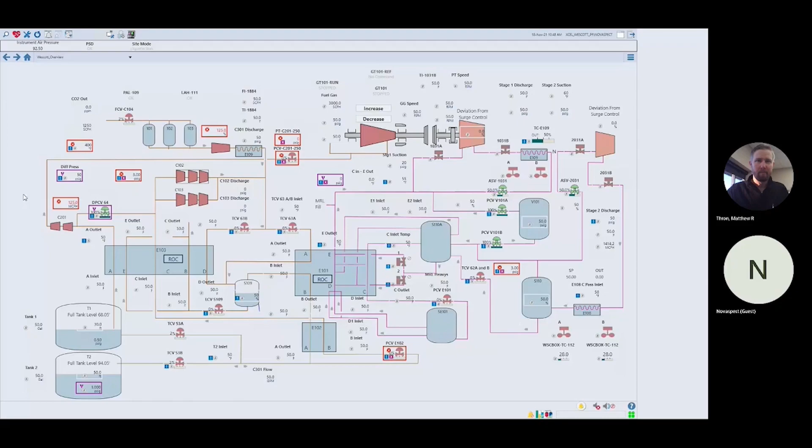Hey Sam, one thing—in some of the earlier training classes we were talking about a pneumatic valve that's got solenoids associated with it. Yeah, I can show you that, that might be of value for these guys to see. Let me go to the vaporization page.

So a lot of these valves, off of P111 and P112, have an air solenoid valve that gets turned on or off to actually let the control happen to open the valve 0 to 100%. You need the instrument air to be there to operate it. You'll see up in this corner a green circle next to the valve, and a red circle next to this other valve. That circle is your air - basically, if it's green you have air to it, and if it's red you don't have air to it. And that air will typically be turned on automatically based on if the pump's running or not.

But a way you could get to this is on these loop faceplates. Just click this, FIC P112. And down here there's a button that says SV for solenoid valve, and that'll open up the faceplate of that valve. Typically we don't actually want to control this manually because we want it to just do that. But if you see there's an issue there, that's where you'd see it.

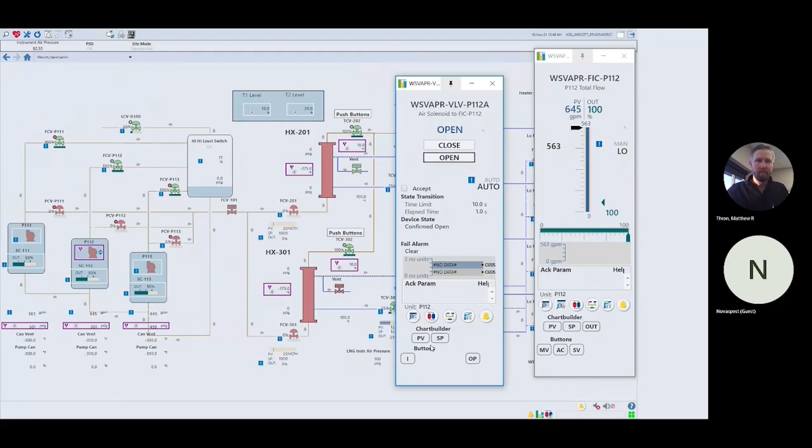So that's not a solenoid on or off, it's air available or not? So it is a solenoid valve that supplies air to the control valve. Right, yep, okay. So maybe a little slightly confusing, but the idea is pretty much just to show that circle is to show you if you have air to the valve or not.

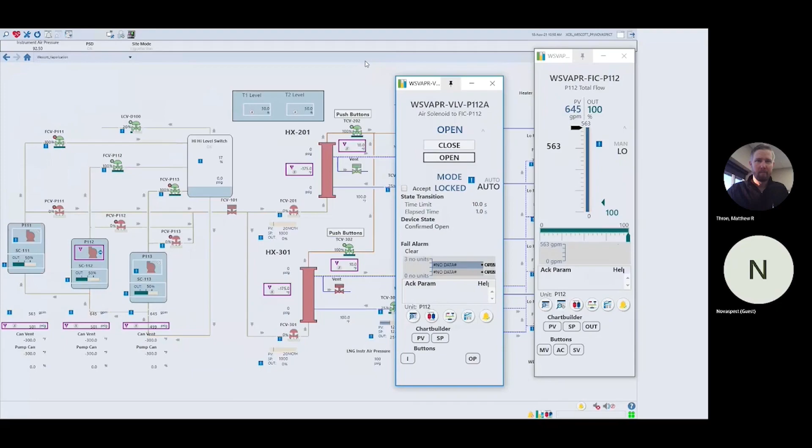How is it getting a reading on that air? Is it actually measuring the air or the solenoid? The solenoid, the position of the solenoid. So if we get an open limit switch, then that thing assumes there's air moving through that. Yeah, the distinction is it's the condition of the solenoid, not whether or not there was air pressure on the actuator one way or the other. Yeah, that's a better way to say it.

Okay, so the idea is you're opening up the valve for the air to go in, and that's what the thing is telling you - if that valve is open or not.

Since you get that screen, the mode lock thing might be of interest to some of them. So if you see mode lock, the idea is that the mode can't be changed - there's something keeping that mode stuck at what it is. These air solenoids, we want them to stay in cascade so that when the pump is started, they turn on always, in case they get forgotten to switch out. You might see that a lot in those air solenoids, but also maybe on a couple other things I don't remember off the top of my head. Typically we don't want it to change out of that mode, and you can't.

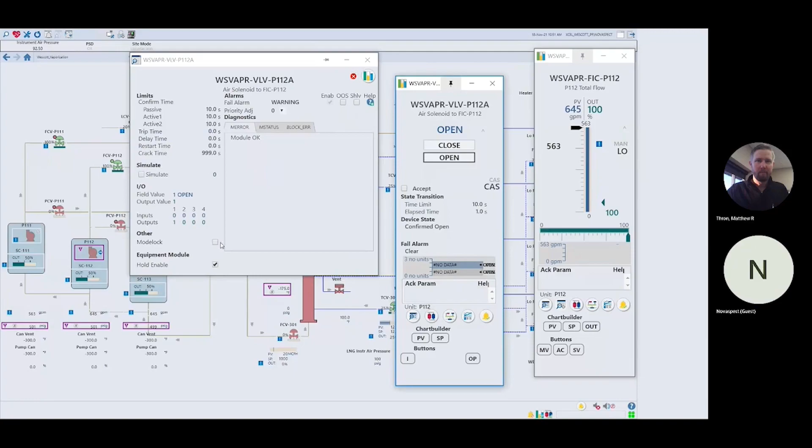So it's mode locked, but this one's in auto. It can be locked in cascade, and it can be locked in. So I have the privileges to do it, so I'm going to turn it off here and switch it to cascade. And I'll mode lock it in cascade.

Yeah, because I had recently done that. But as supervisor, if I understand it right, still if you have the right permissions when you log in, then you can, just like what you just demonstrated. Yes, exactly. I think Rich is the one who had the permissions - I don't remember exactly who, but yeah, there will be different permissions there.